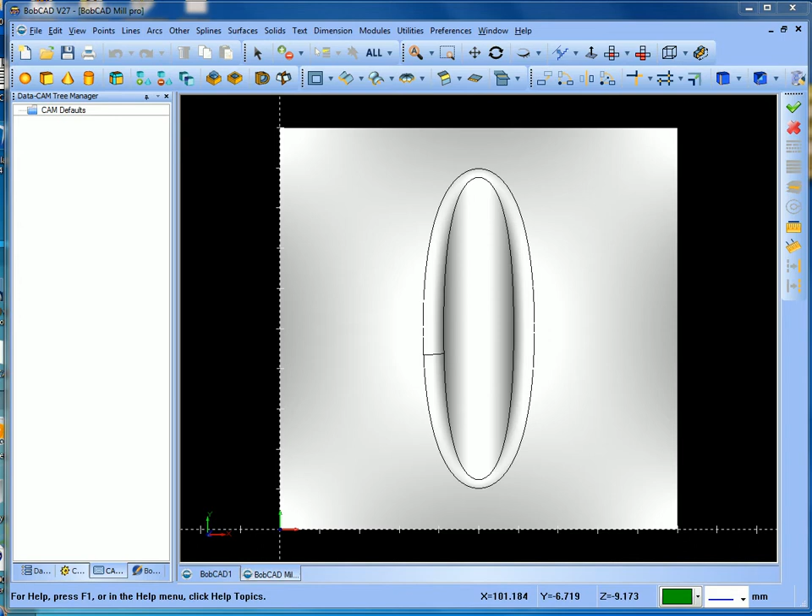So what I'll do is take you through the stages of machining this up and show you how we'd machine it in BobCAD. First thing I'm going to do is right click and create a new job. I'm going to do some milling.

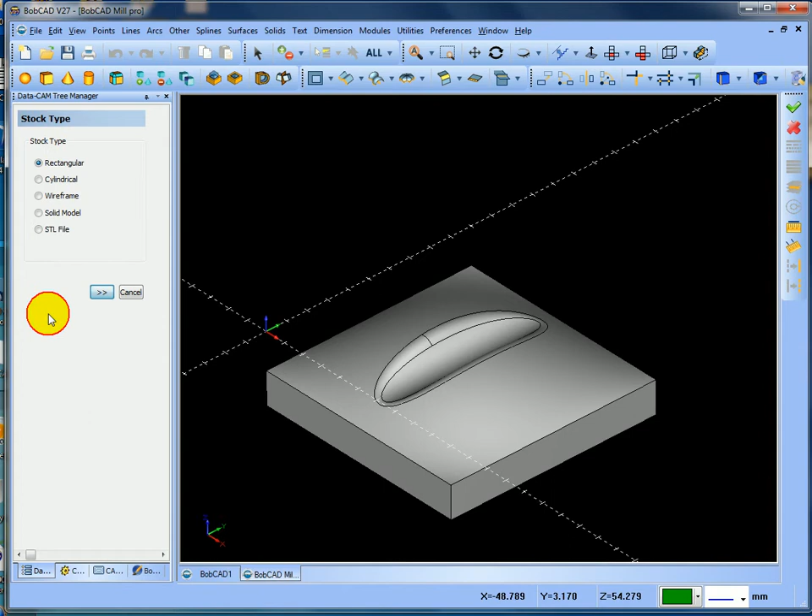The machine I'm using is that, and what I need to do is put the stock wizard on. So if I select stock wizard, I'm going to create a rectangular block, and you can see now it's picked up the size of the material to produce this component, taking it from the model.

I'm happy where it is at the moment, that's where I want it to be. So if I select next, it's asking me to pick the origin.

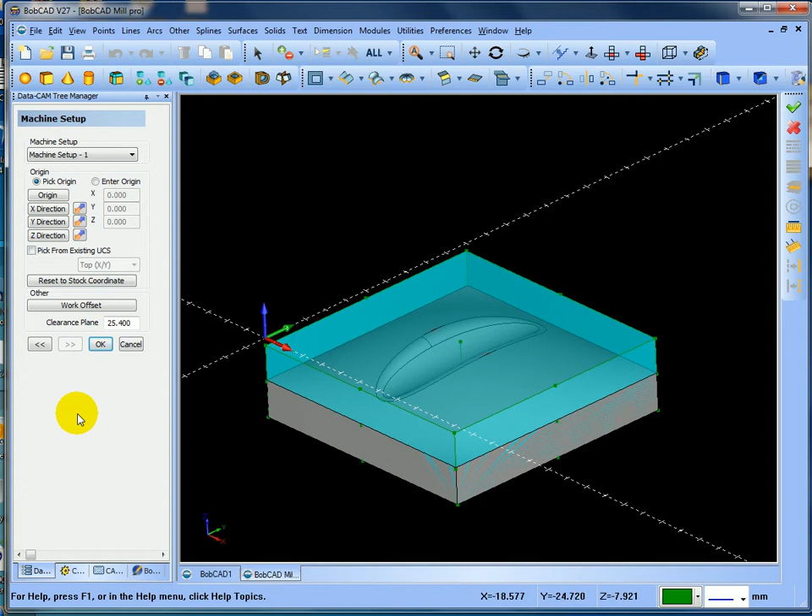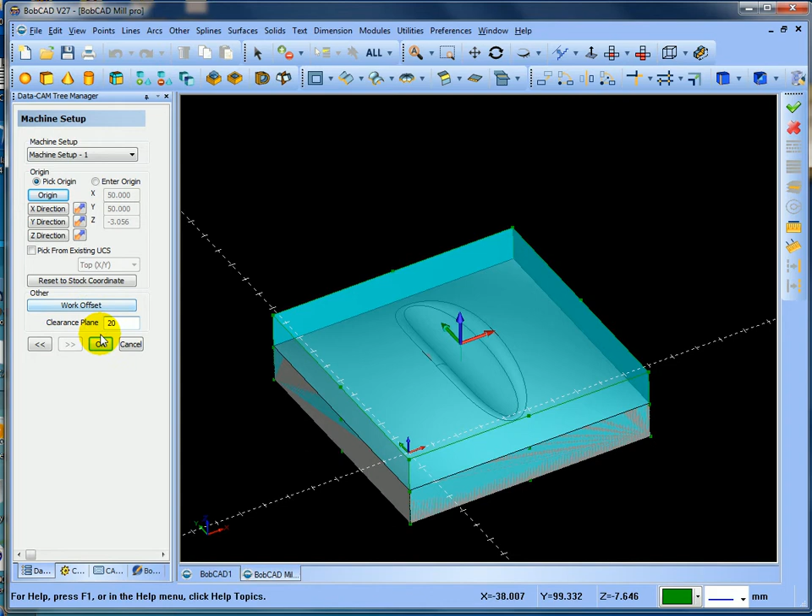Now at the moment it's got the origin on that left hand corner. I could pick the top of the job, which is on the center line. So if I wanted to pick this, I can go and pick the origin, highlight the point, and you can see now I've got my origin set in the center, which is where I want it to be. I'm going to give it some clearance above there as my rapid position of 20, and select OK, and we've now created the stock material around this component.

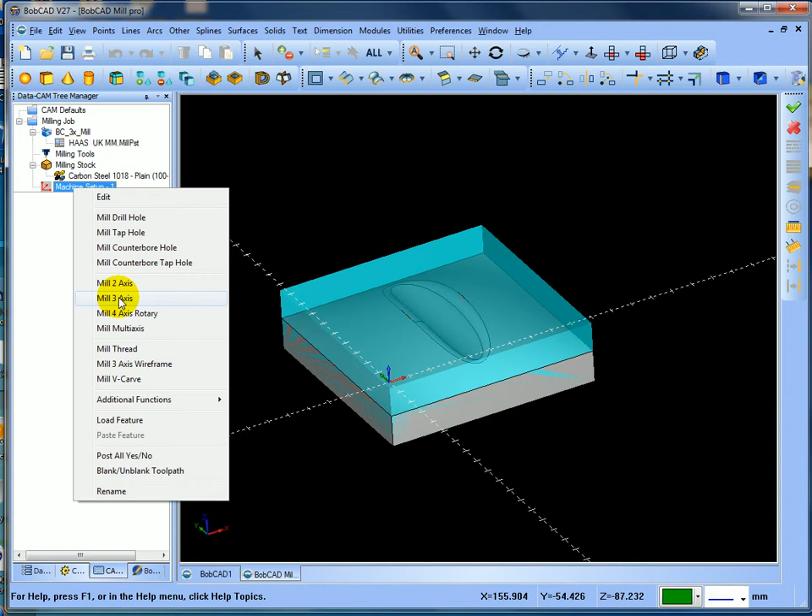So what we're going to do next is put an operation in. As you can see now I'm in the machine setup. I'm going to right click and put a 3-axis toolpath in. I'm going to select the geometry, which is the component, right click, select OK. Next.

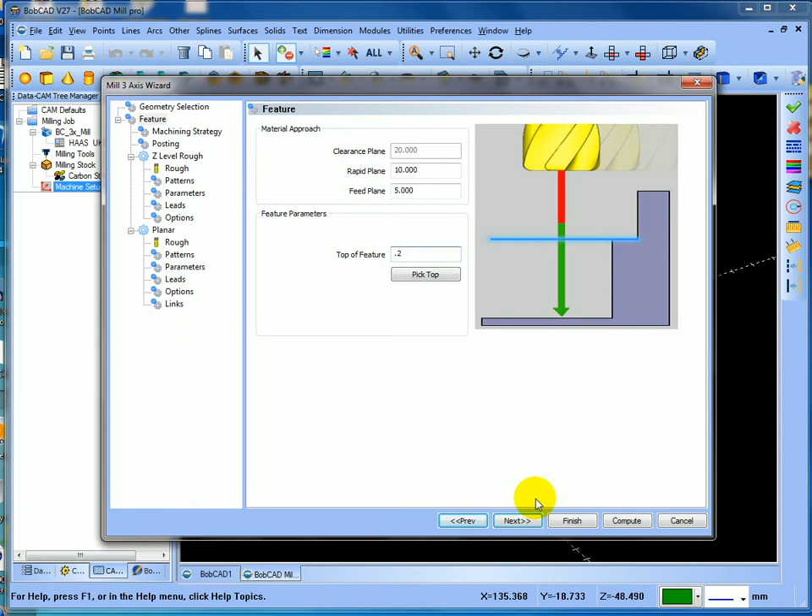Rapid, 10mm above the job. I'm just going to put 5mm clearance. I'll say top of the job's got 0.2 on. Next, I'm going to do an advanced rough. Next, work offset, which is G54. I want to arc fit, in other words any arcs instead of lines. I'm going to use arc fit.

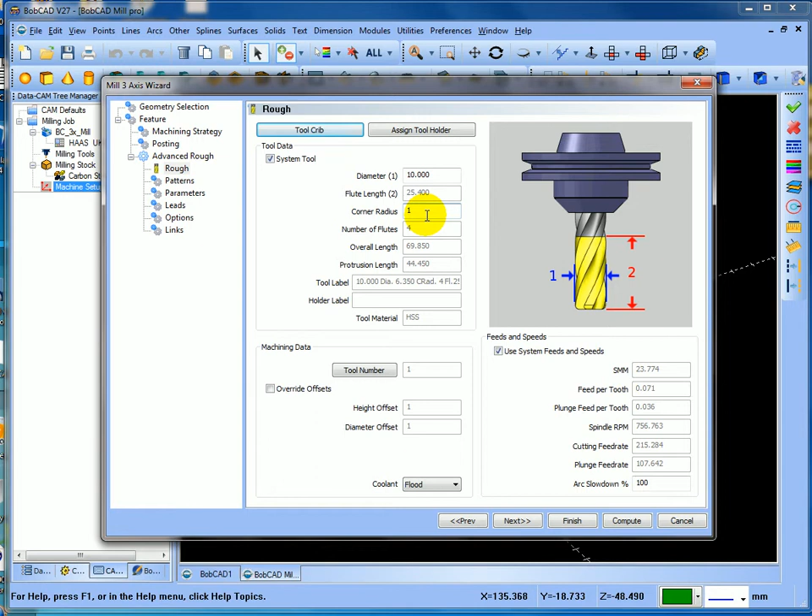Next, I'm going to put a 10mm cutter in. I'm going to put a 1mm corner rad, so we've got a 10mm with a 1mm bull nose cutter. Select next. I'm going to do adaptive.

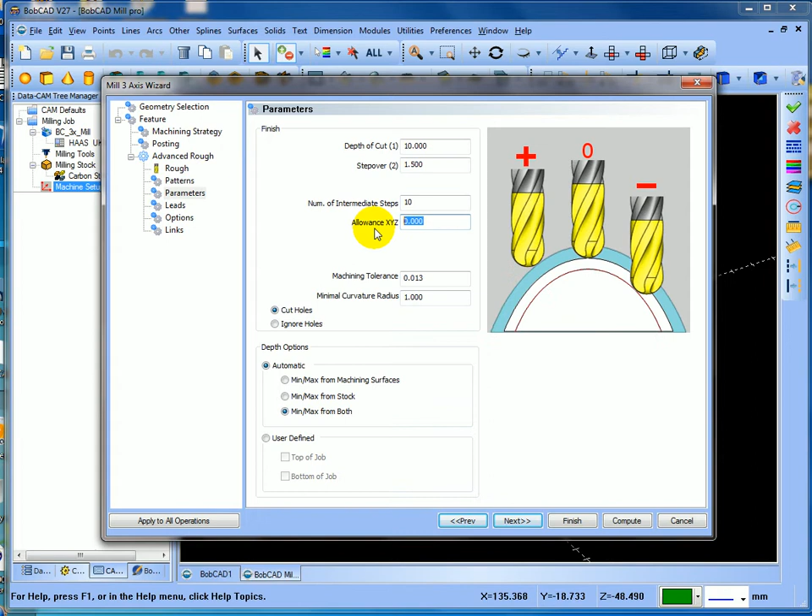Next, I'm going to come down in 10mm depths of cut, and I'm going to put 1.5 as my side step. I actually want to come back in a 1mm cut, so I'm going to divide that by 10, and I'm going to leave 0.5. Next, next, next, and compute.

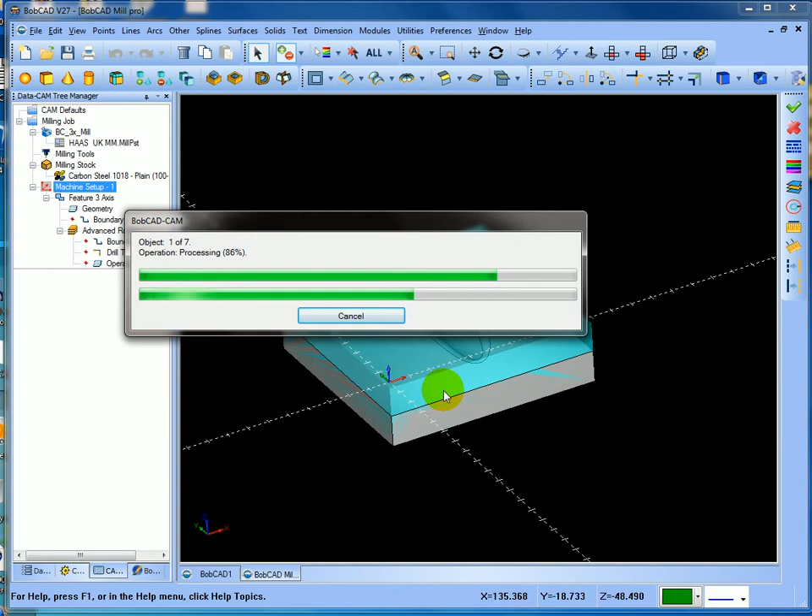So it'll just take a few minutes to compute it. So you can see we've computed the toolpath.

So what I'll do is we'll just simulate that. So if I go into modules, simulation, and as you can see now it's put the block in with the toolpath. So I'll just hide the toolpath, slow it down a little bit, and start running it.

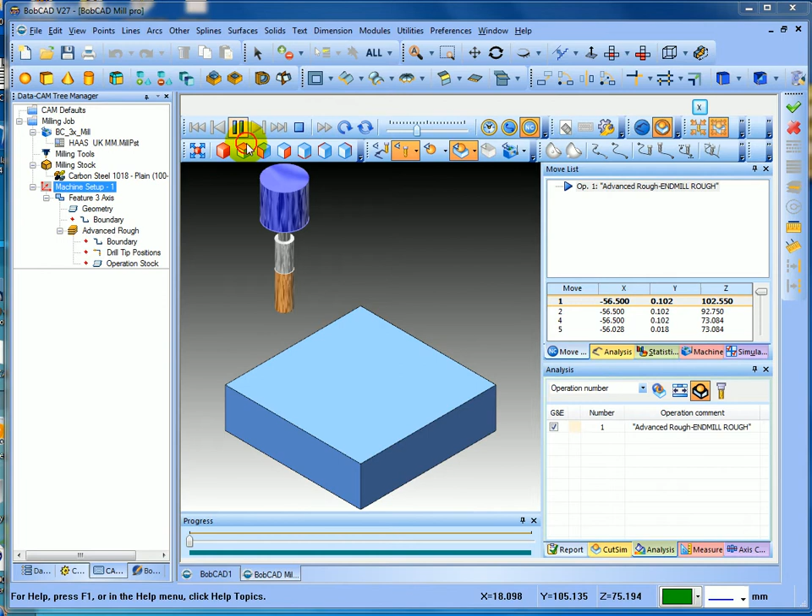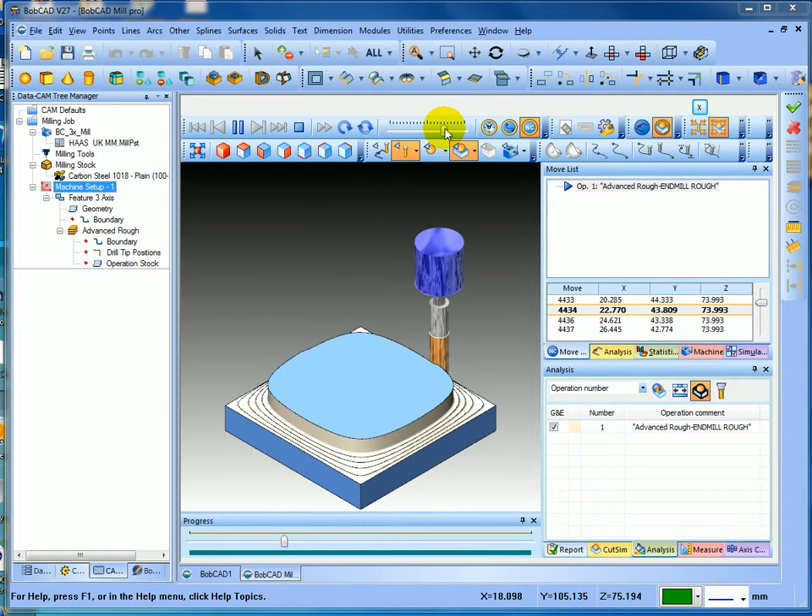Now you can see it's cutting on the side, and it's cutting 10mm depth of cut, and it's going to spiral its way inwards using that 1.5 side step. So if we speed it up, you can see it goes all the way around, then it comes to the next level, and now you can see it's stepping up in 1mm cuts, and it's cutting out that top shape.

It'll do a trochoidal toolpath across there in high speed, and then it'll come back and rough it out. So you can see it's roughed out the component.

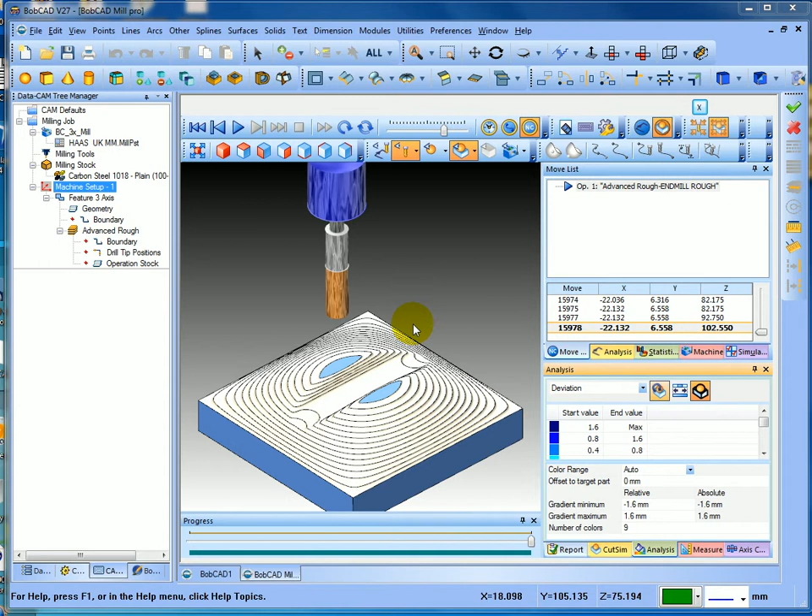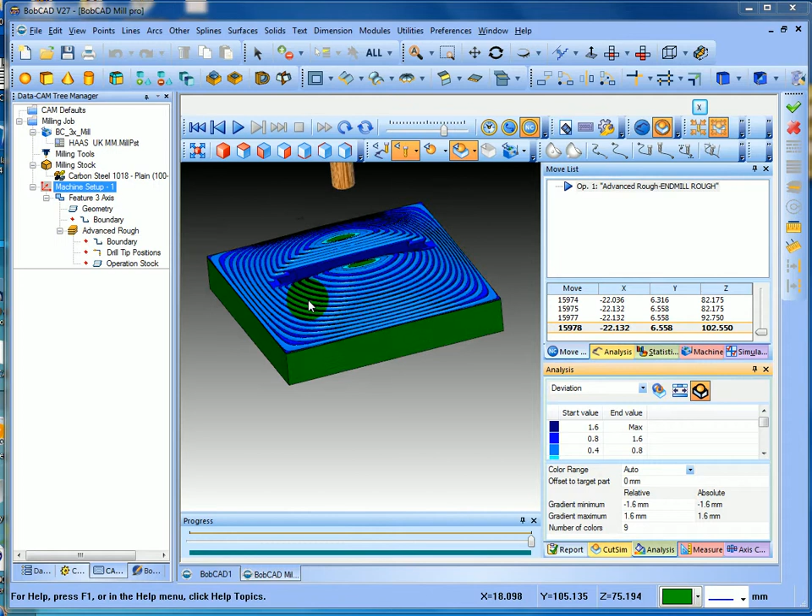So we've roughed it out, so what we want to do next is some planar toolpaths across it. Just view that as it is, and we'll close that down, and then what we'll do now is put a planar toolpath on.

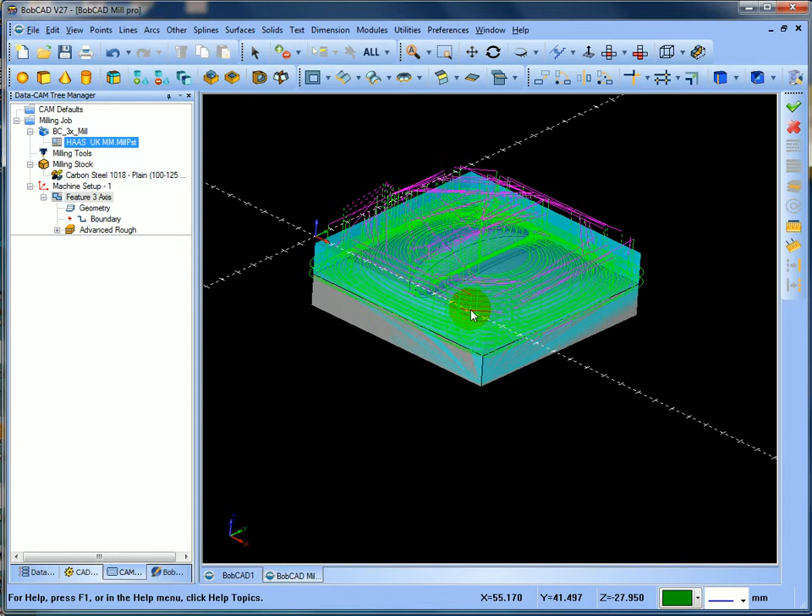So we've created the roughing toolpath, now I want to do a semi-finished toolpath. I'll turn the stock off and blank out the toolpath so we can't see it. What I need to do now is create another feature to machine this top surface, and we'll use this as a semi-finisher.

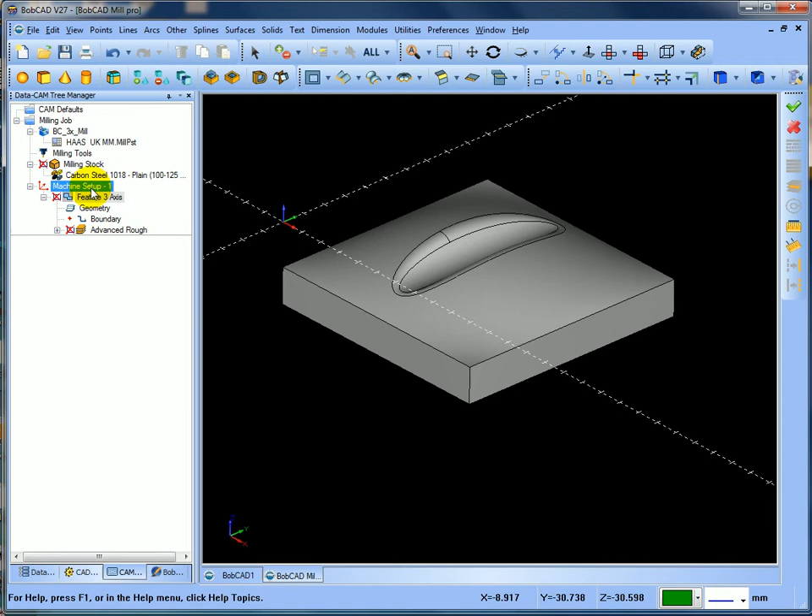So if I go into the machine setup, I'm going to insert a mill 3 axis. I'm going to select the geometry, press the space bar, select next. I'm going to say rapid's going to be 10, I'll leave that at 5. Top of the job is 0.

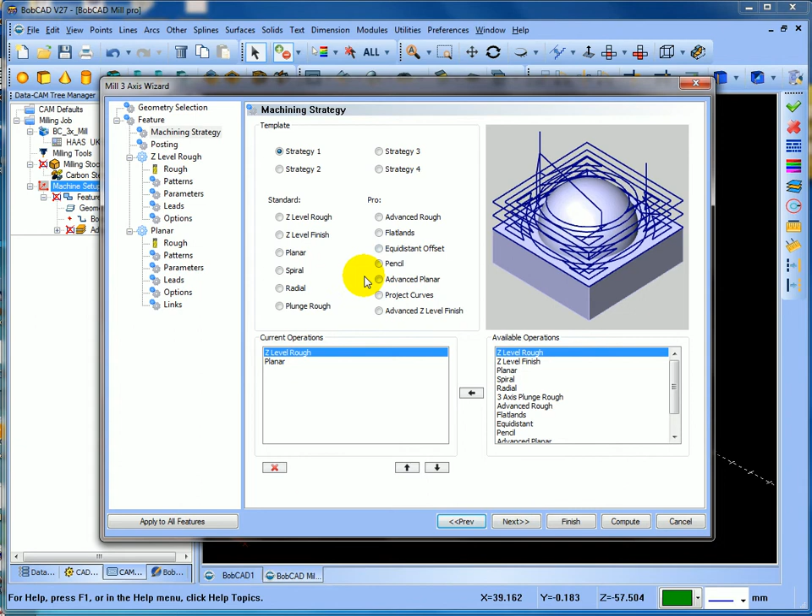Next, what I want to do is a planar toolpath. Select next, work offset number 1. Next, I'm going to use myself - we'll use a 10mm ball nose to rough it out.

So I'm just going to work on the fly. I've got a 10 diameter, and I'm going to put a 5 radius in there. Select next, I'm going to use zigzag rather than zig. Zig lifts it up and comes back over, but zigzag stays on the form, stepping over. We've got an angle of 90 degrees, and we're going to climb mill.

Select next, I'm going to do a step over. Let's create this as a 0.5 step over, and we want to leave 0.3 in there. Select next.

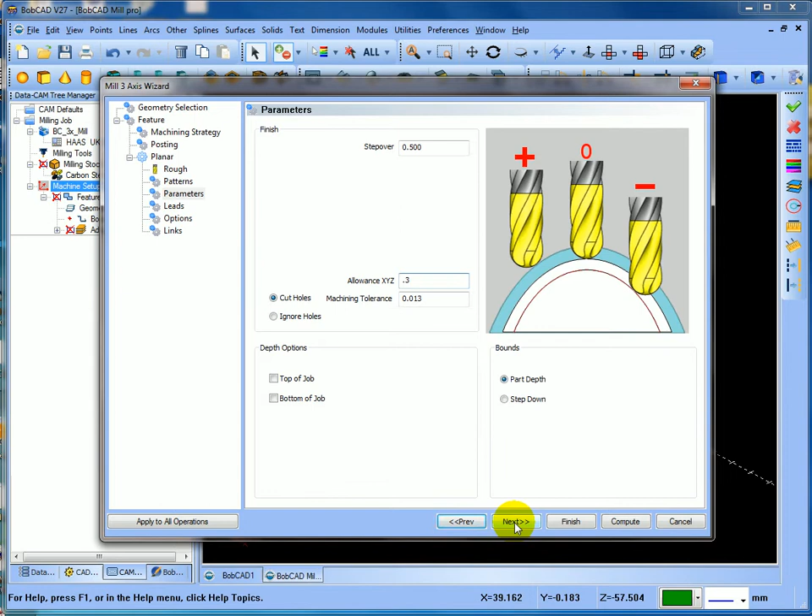Next, we're going to plunge in. Next, extent - we're just going to go up to the edge. Select next, and we're going to follow so it stays down rather than lifts off. You can see if we go into horizontal and vertical, it'll lift off and come on, lift off and come off. We want it to follow, we want it to stay down.

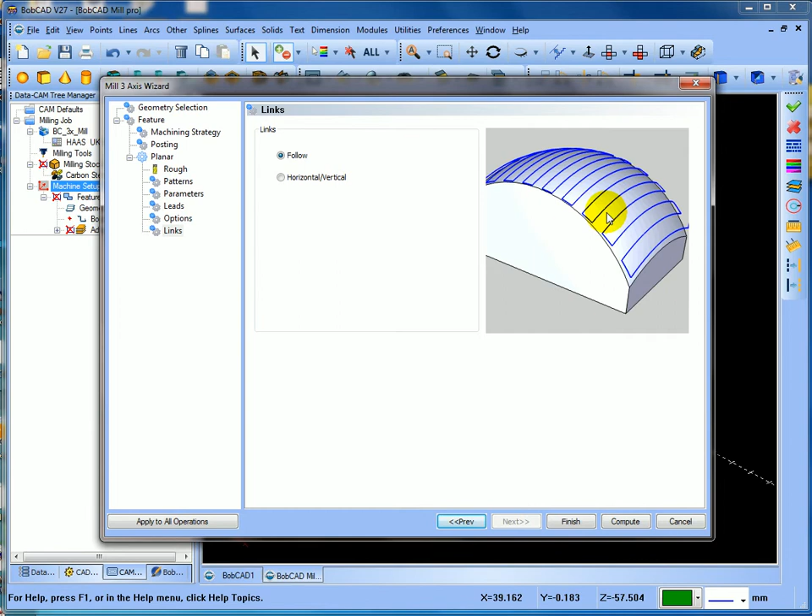If I go into compute, this will just take a little while to compute. You can see now we've created a toolpath. Now I've got it going this way - it's going across the angle that way, and I want to change the angle. I want it to go the other way.

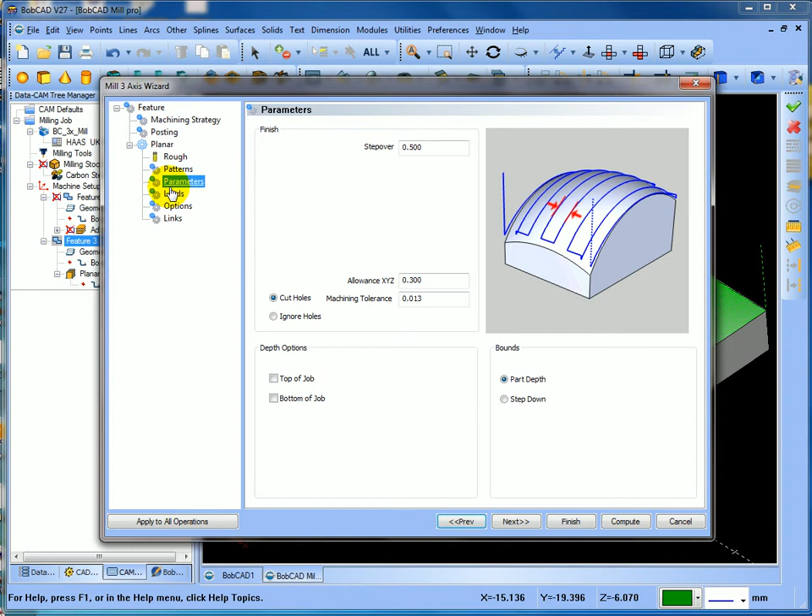So if I go into here and edit the feature, I can go into the pattern and change that, make that 0. All I need to do then is just compute the toolpath, and you can see now we're going across it that way.

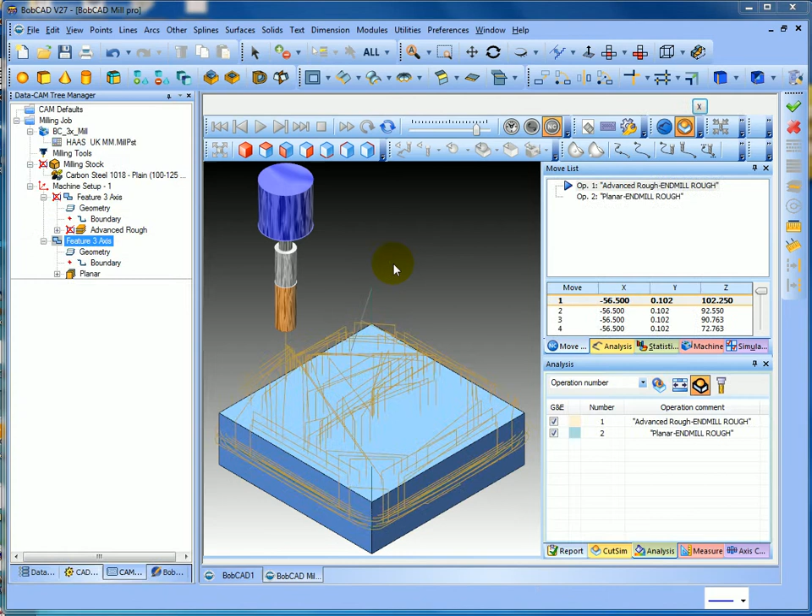So if we simulate that now as a pre-roughing operation, if I go into modules, simulation, just take the toolpath off. Now you can see here I've got the advanced rough, which we saw, and we've got the planar. Well, I don't want to run through the advanced rough again, so all I need to do is click that, and the verification will just come along.

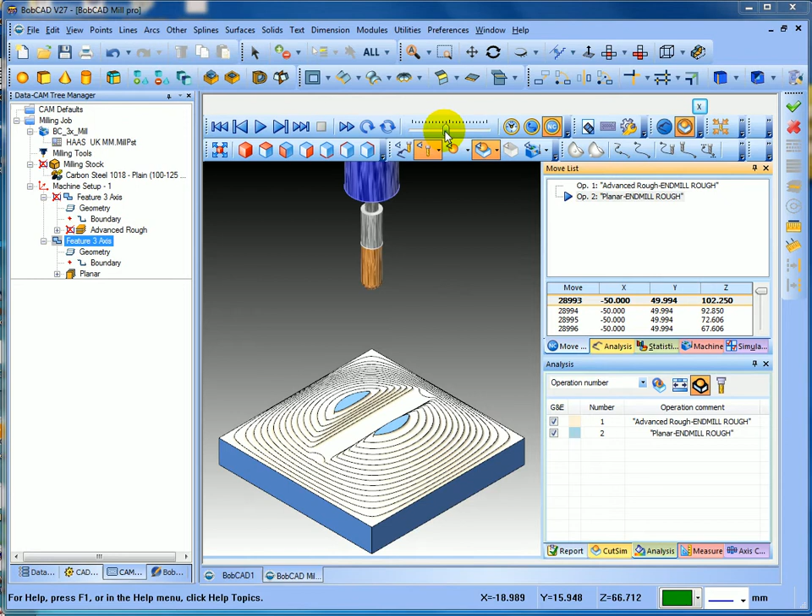And you can see now it's got rid of it. So what we're going to do now is just follow the semi-rough with this cutter. If I select start, you can see now where it's just stepping over.

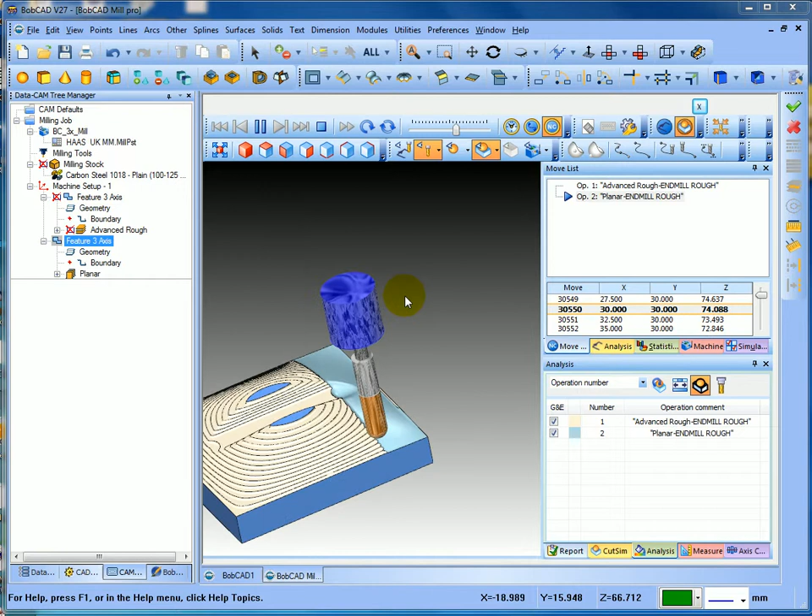Let's speed that up. Doing a 0.5 step over, and it's leaving 0.3 in - taking out some of that weight off the radius in there.

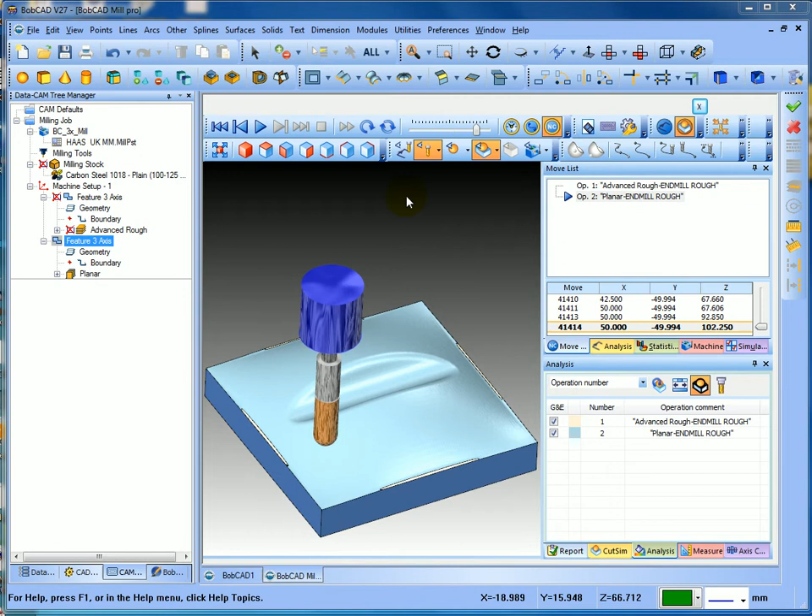So I'll just speed that up to the end. And you can see now it's come to the end. We'll do a verification to make sure there's material on there.

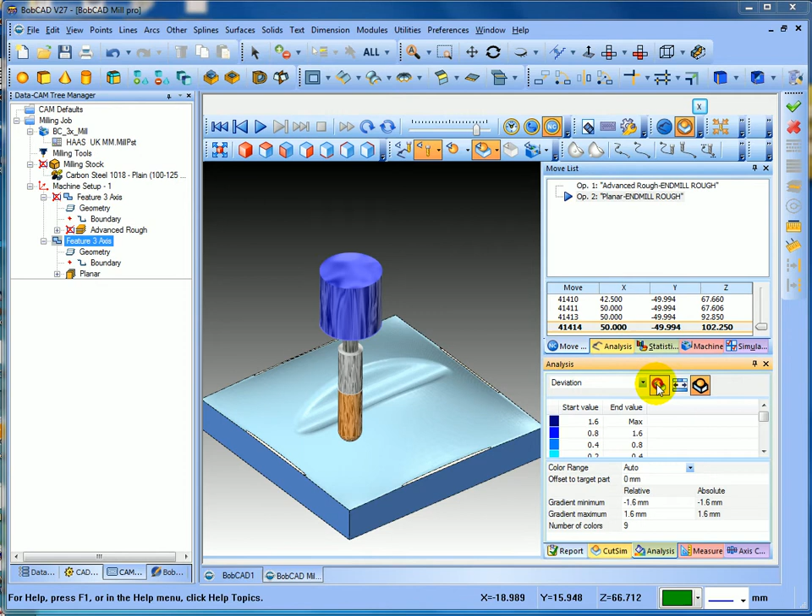Deviation, and then what I'm going to do is tell it to refresh. That's on operation number - sorry, let's go to deviation. There's the values for the deviation, and there you can see you're leaving material on, it's not green yet.

So what we're going to do then is we're going to do a finishing toolpath to finish that.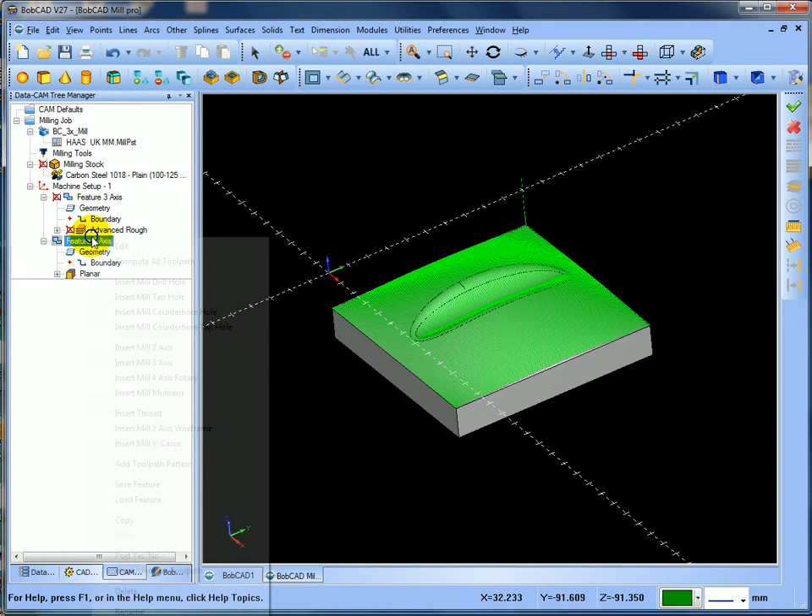So what I'll do now is blank that toolpath out, I don't want to see that toolpath. What we want to do now is a finishing toolpath with an 8mm ball nose cutter.

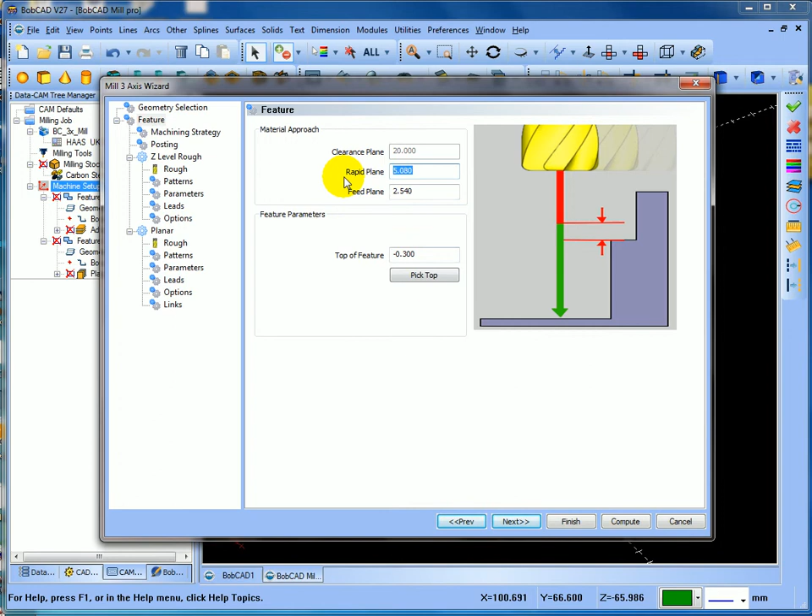So if we go into machine setup, create 3-axis, select the geometry, highlight the geometry that I'm selecting, hit the space bar, next. Once again 10 and 2 off the job, top of the job is 0, next, planar again - or I could have duplicated that operation, I'll show you that as well. So next.

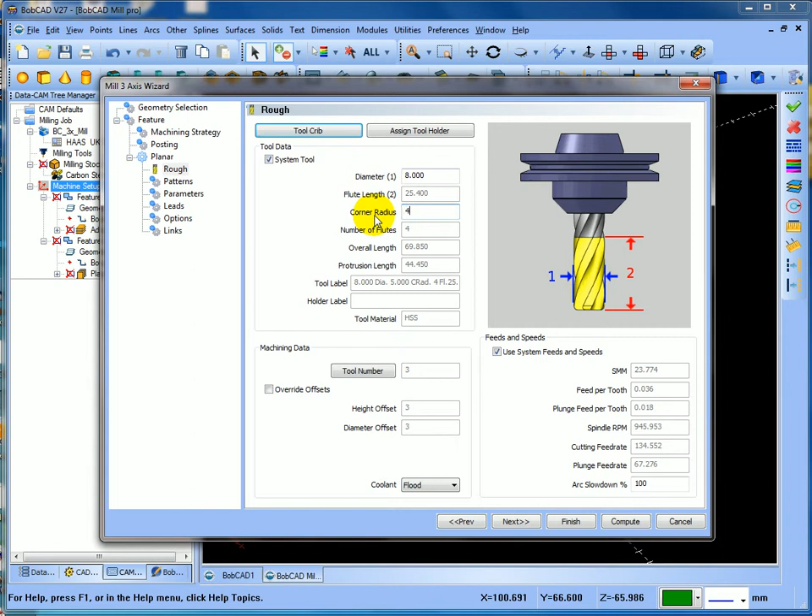We're going to use an 8mm ball, 4mm rad. Next, we're doing zigzag, we'll go over at 0 degrees, or we could have gone over at 40 - let's do it at 45 degrees. In some instances you will apply it that way. So we're not doing zig, we're doing zigzag. I'm going to climb mill, next, step over, let's call it 0.2, leaving nothing in. You can adjust the machining tolerance.

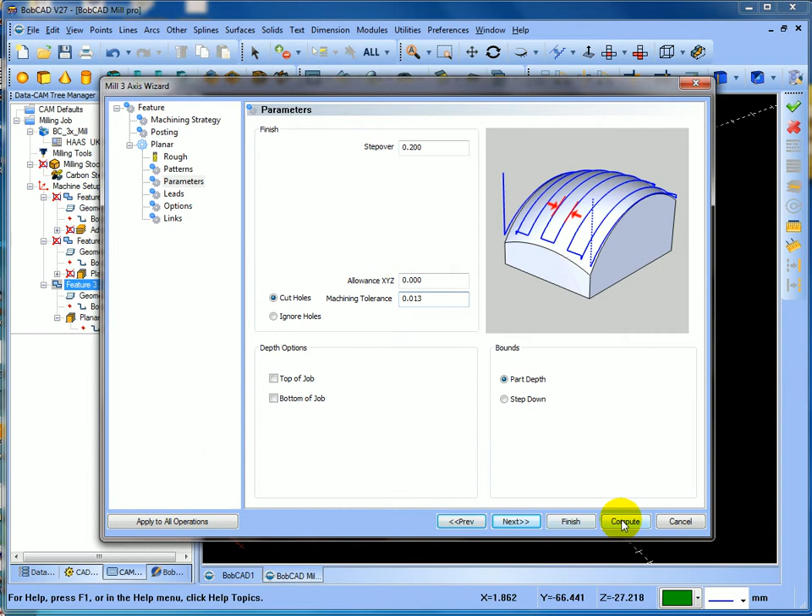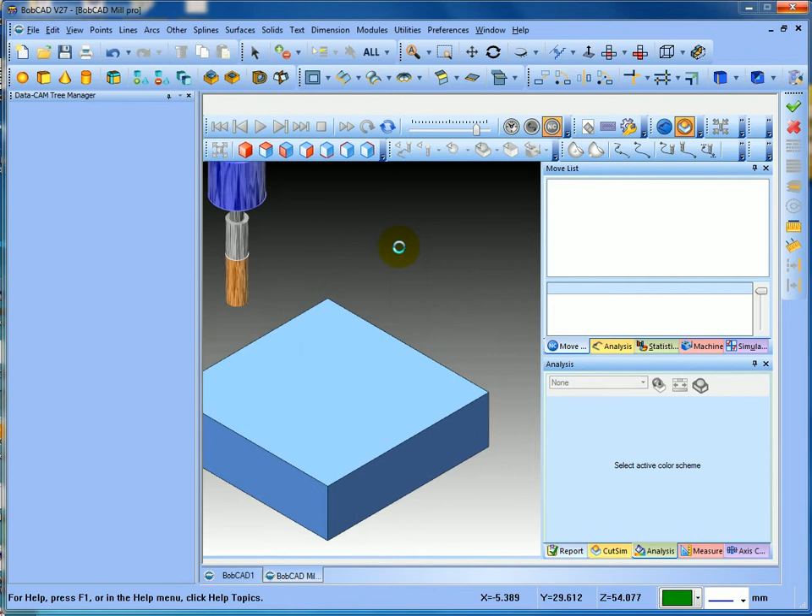And there you see the computed toolpath. So if we go back in and let's simulate that again. If we go into modules, simulation, let's turn the toolpath off. Let's hit this button here because I've already seen that. I want to go down to that one, the verification. It saves you a lot of time in the simulation side, where the verification just does everything for you. And you can see now we're ready to run that.

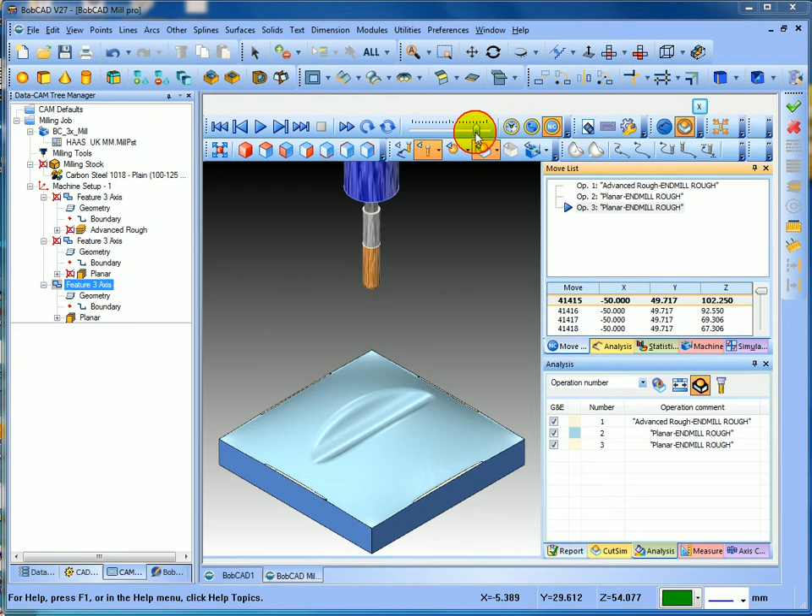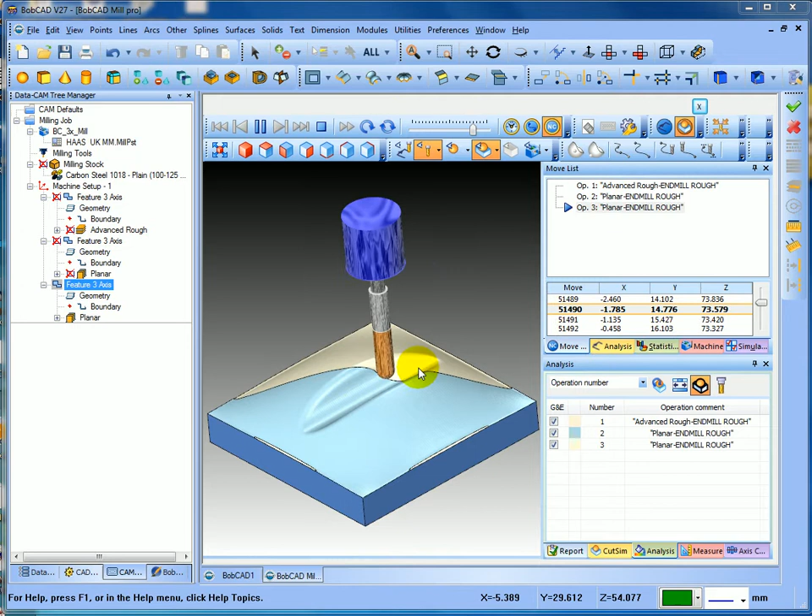So if I did actually put it at an angle, so if we run it now, you can see it's coming across at 45 degrees. So if I speed that process up, of course it takes a lot longer, but sometimes you need to come across at an angle rather than at 0 degrees or 90 degrees. But in this instance I've done it at 45 degrees.

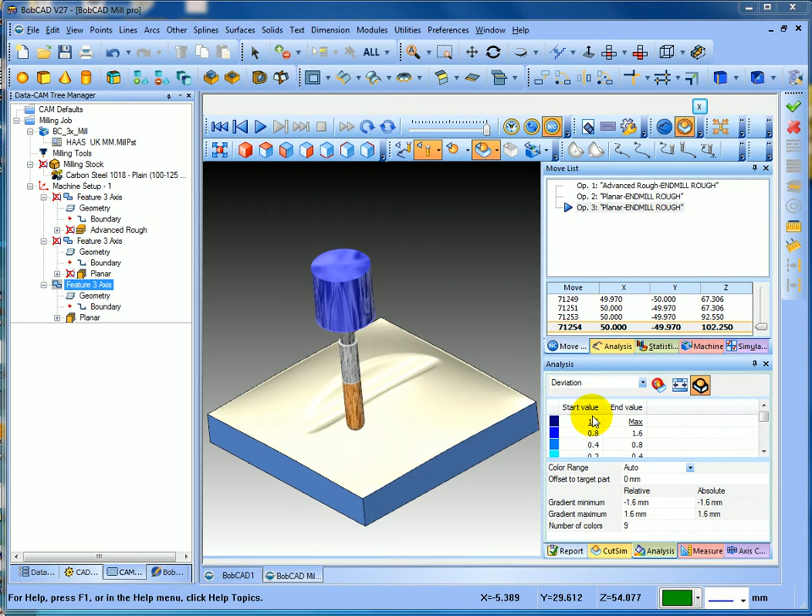So we'll wind it up to the end. So now if we have a look at what we've got, if we go into Analysis, we go into deviation, and there you can see it's machined up the component using an angle of 45 degrees.

Now one of the great things in BobCAD is you can see here where we've just not quite got the edge. I'd like to come a little bit further. Well, it's quite easy to do in BobCAD, I'll show you.

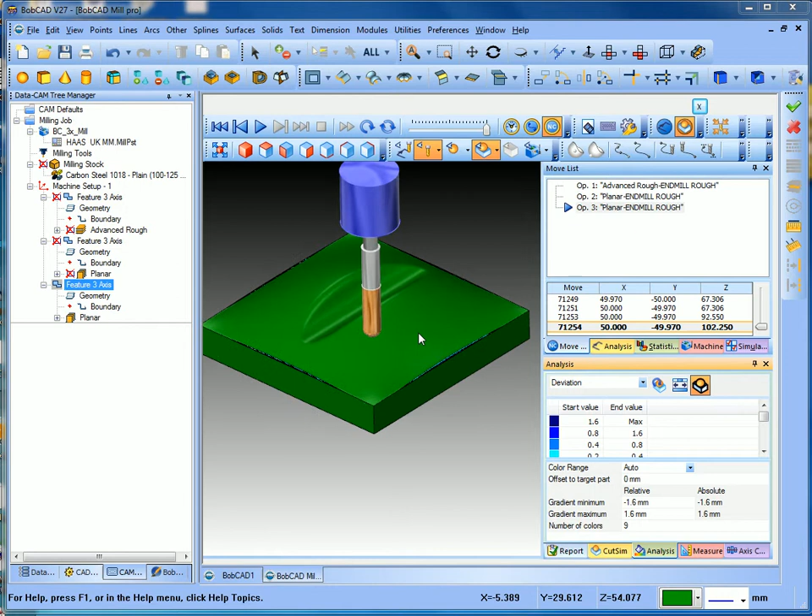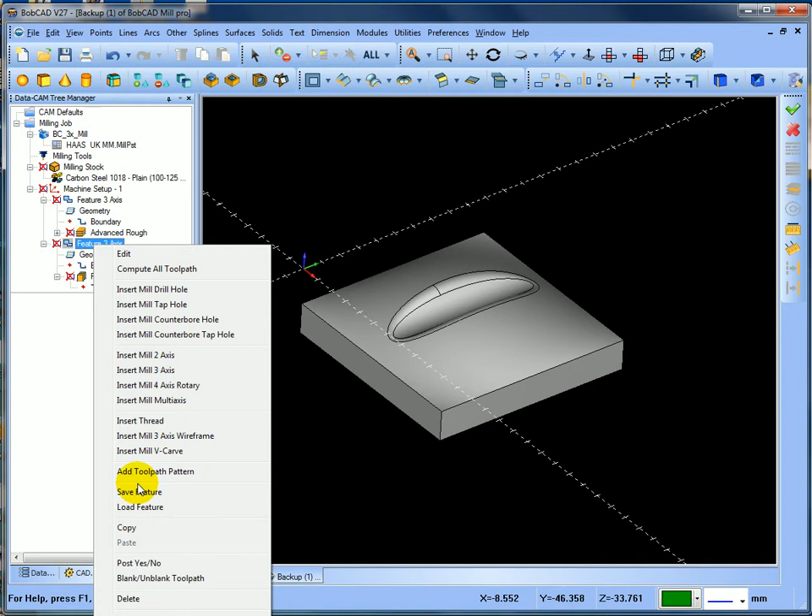We'll come out of there, okay, and I'll just blank the toolpath. Last time I explained how we could do this a different way. I'm actually going to right click and delete this feature, and then what I could have done is gone into there and I could have copy feature, and then I could go into there, right click, and I could paste feature. You can see I've pasted the same feature as I've done there.

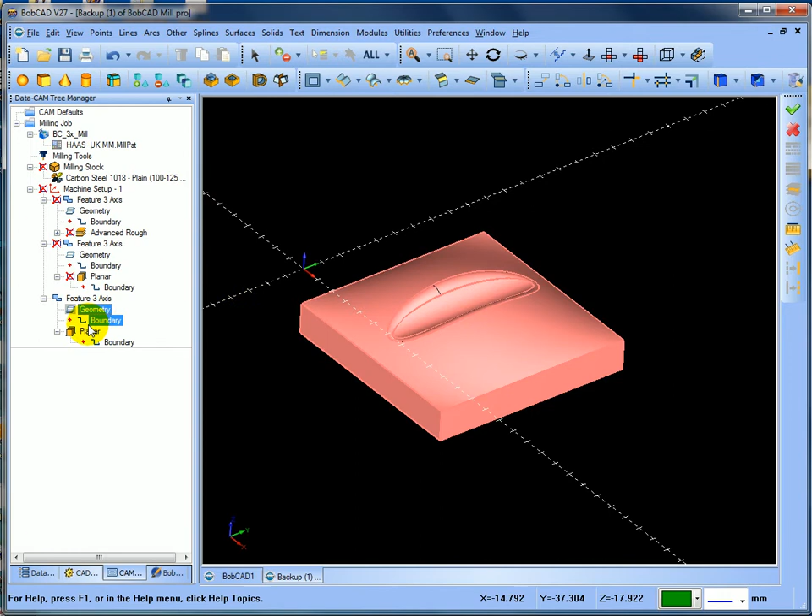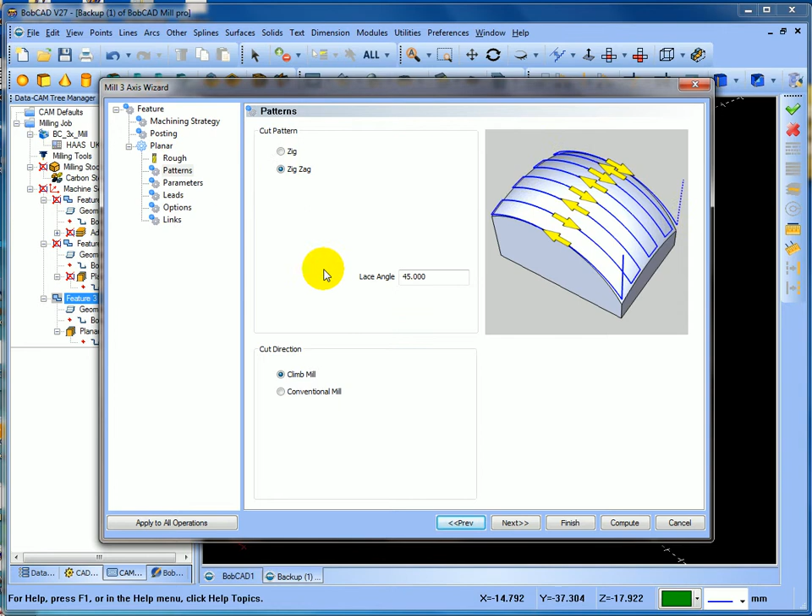So all I need to do is just go back in and reselect the geometry. And what we can do then is just edit it, because we need to edit the planar here, next, and this time we're using an 8mm, 4mm rad, next. We're going to do that at 45 degrees as we said, and we're using zigzag, next, step over, 0.2, leaving nothing on, next, extents, next, follow, and we can just compute it.

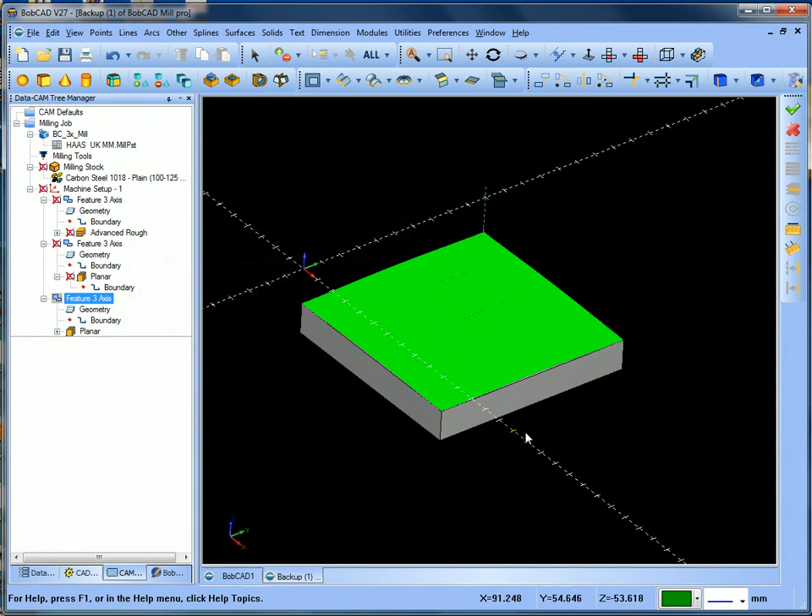So as you can see, we can just create features and copy features. Let me blank that out for a minute now. Let's just blank.

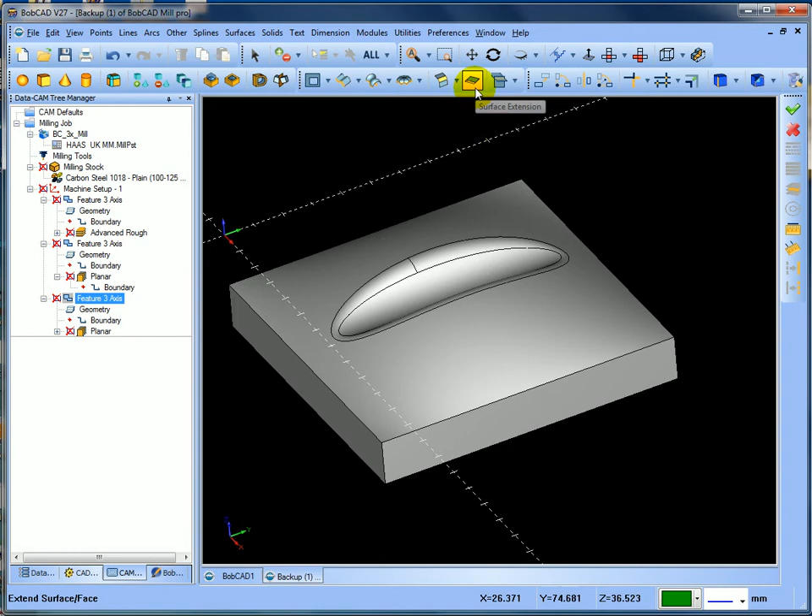Okay, many machinists want to actually come off the job rather than come onto the job. So what you can do is you can extend surfaces in BobCAD. So if we're going to extend, surface extension, I'm just going to give it 4mm. And if I come on the edge here, you'll see pick the edge up, and I want to extend that out 4mm, which is what I've got. Select, and it's all going normal to the surface.

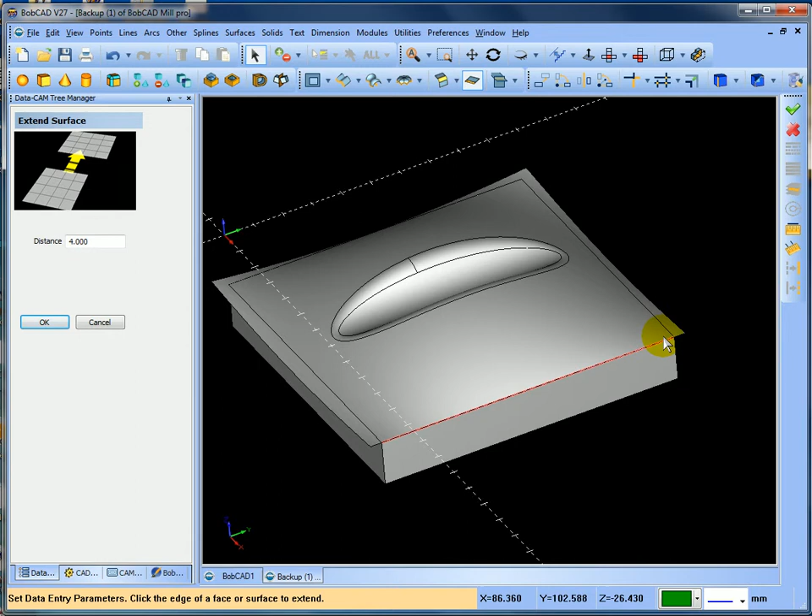Select OK, and then what I want to do is I want to do the same on that edge. I want to come out 4mm. Select OK, and I want to do the same on this edge. Come out 4mm, and I want to do the same on this edge here. Just pick the edge. There we go, and select OK. Now you can see now I've extended it, extended all the surfaces normal to the contour.

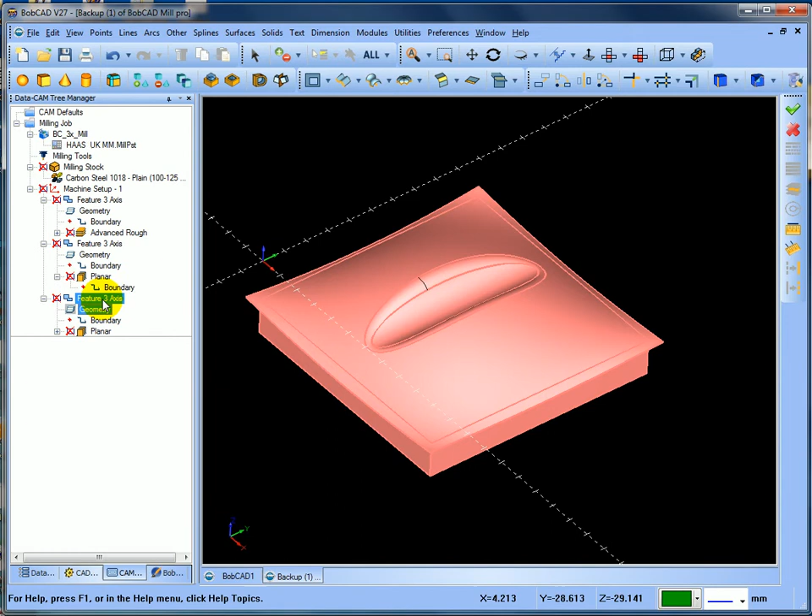So all I need to do then is go back into here, and what I'm going to do is remove that geometry, and then I'm going to reselect the geometry. So all I'm going to do now is pick everything, right click, select OK, and then just tell it all I need to do is compute the toolpath.

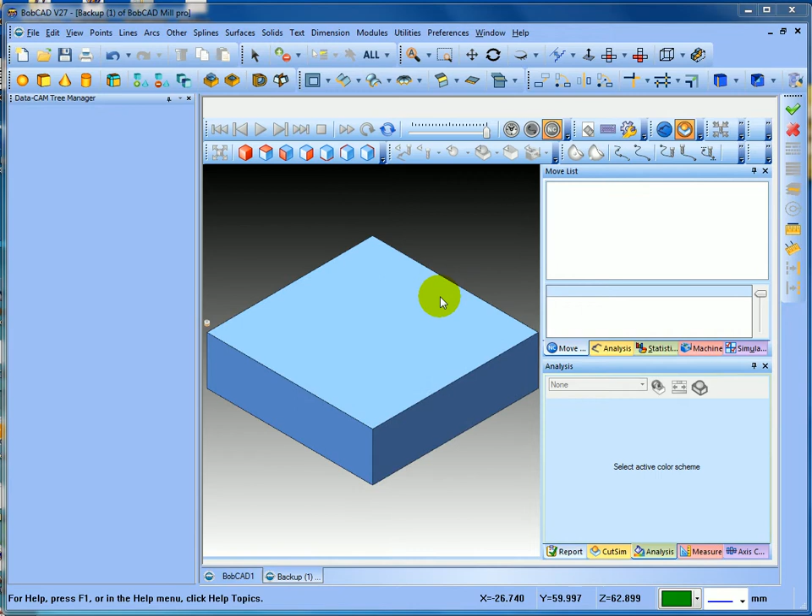Just take a minute, and if I right click and unblank the toolpath, now you can see it's come further out of the component to machine up. If we have a look again in the simulation, if we go modules, simulation, turn off the toolpath, let the verification, it saves you waiting for everything.

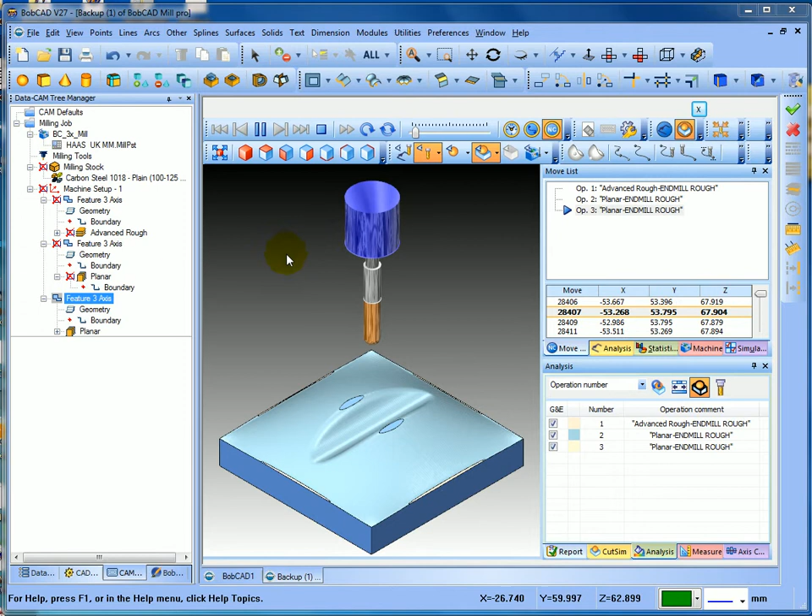Okay, that's where we were at before. If I just slow it down now and run it, you can see it's come off the job. It's not on the job, it's come away from the job. So we speed it up.

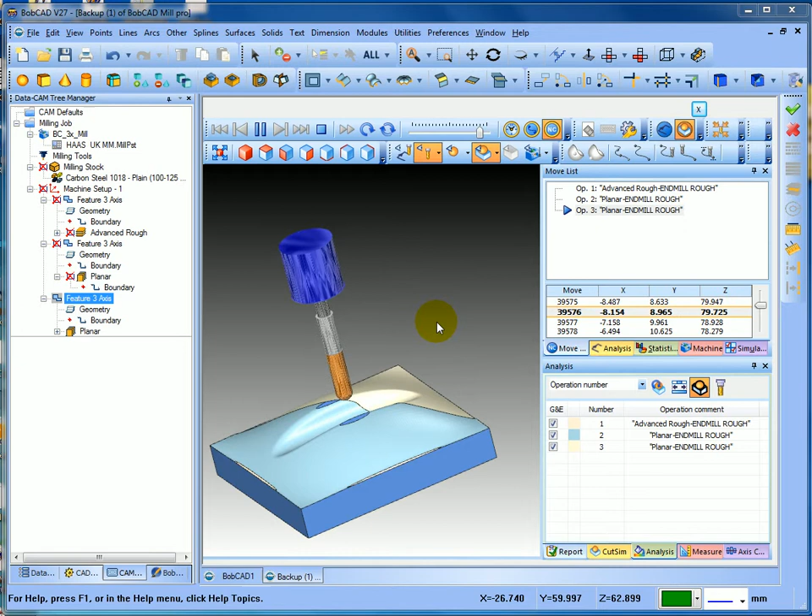And you can see you've gone beyond the surface. It's going to give you a nice edge. Just fast forward that along. And you can see you won't have any issues there because you've gone past the surface.

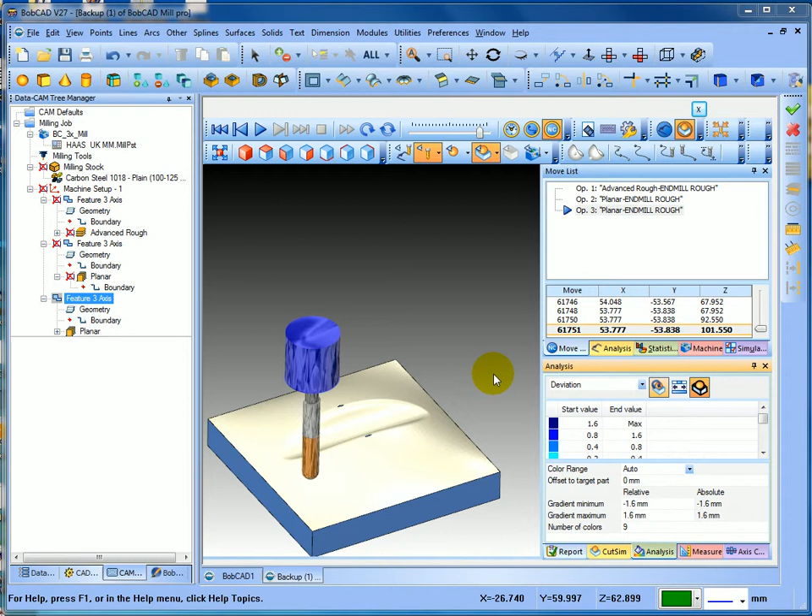So you can see in BobCAD it's quite easy to extend the surface. If we go in and do the deviation, there you can see you've got a nice crisp sharp corners around your component. So if I close that down and we just blank that toolpath, blank, you can see how we've extended them surfaces.

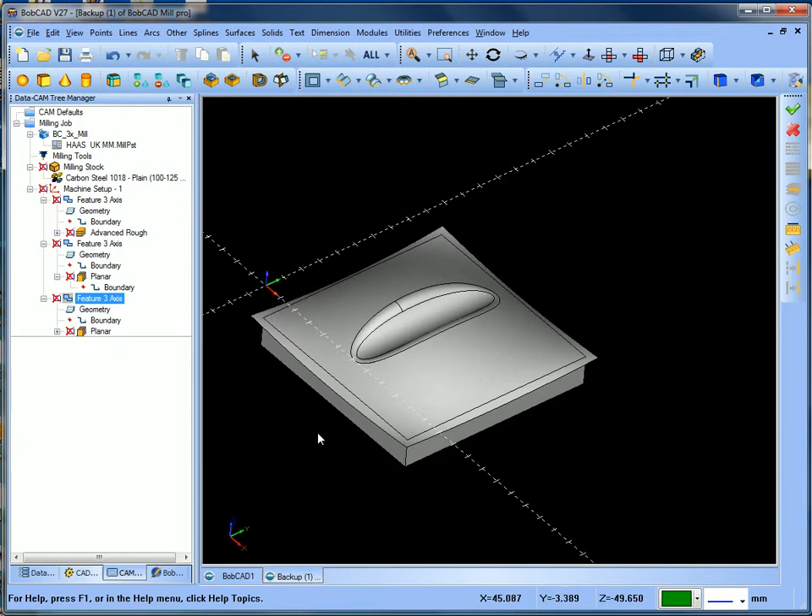So hopefully that'll help you get started. A quick introduction into how to machine that component. You may not machine it the same way, but hopefully I've given you some ideas of how to machine something like that. Hopefully that helps you get started, and thank you for watching.